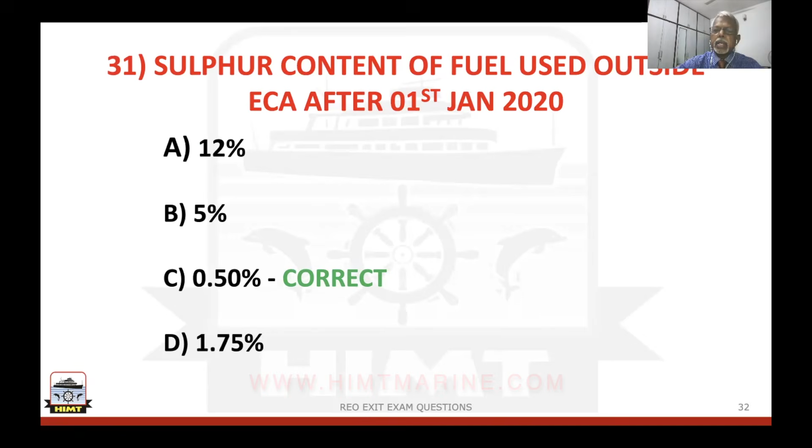Sulfur content of fuel used outside emission control area after 1st January 2020. It's the latest regulation. Yes, all of us are aware: 12%, 5%, 0.5%, or 1.75% mass per mass. That is the sulfur content, that is how it is mentioned. So the right answer here is C, 0.5%. That is the correct answer globally, whereas in an emission control area it is 0.1% only. So 0.5, C is the right answer here.

Which type of fire occurs mostly at machinery spaces? Is it A, B, B, C, or A, C? So we all know what is a Class A fire, Class B fire, Class C fire. B fire is all about liquid related fires; oil fires come under B. And Class A fire is your cloth, paper and things like that. So B, C. Class B fire, Class C fire, that's the right answer here.

Fire in accommodation is due to faulty electrical connections, smoking, presence of oil. The last option given here is both A and B. Presence of oil, chances are less. So it is both A and B. D is the right answer, the reason for accommodation fire.

Appointment of designated person ashore is through company, charterer, recognized organization, ISM. If you see, your DPA requirement comes as one of the elements of your ISM code. So D is the right answer. How can the safety on deck be improved? The answers given are by inspecting daily at 8 in the morning, the bosun will take care, by keeping deck clean and clear, or both above are correct. That is the right answer. D is the right answer to maintain safety on the deck.

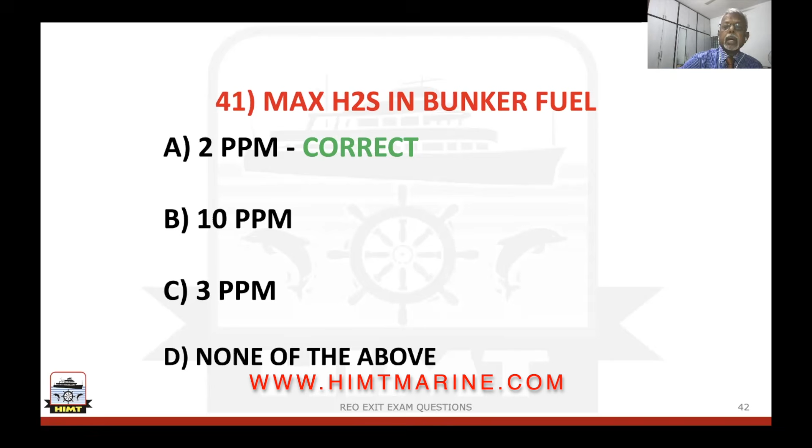The next question is hydrogen sulfide in bunker fuel. How much is allowed? Is it 2 ppm, 10 ppm, 3 ppm, or none of the above? Bunker oil, as we are aware, comes from crude oil. Crude oil always has sulfur in it, so hydrogen sulfide will be there. Desulfurizing is done in the refineries. The maximum allowed is only 2 ppm. So A is the right answer here.

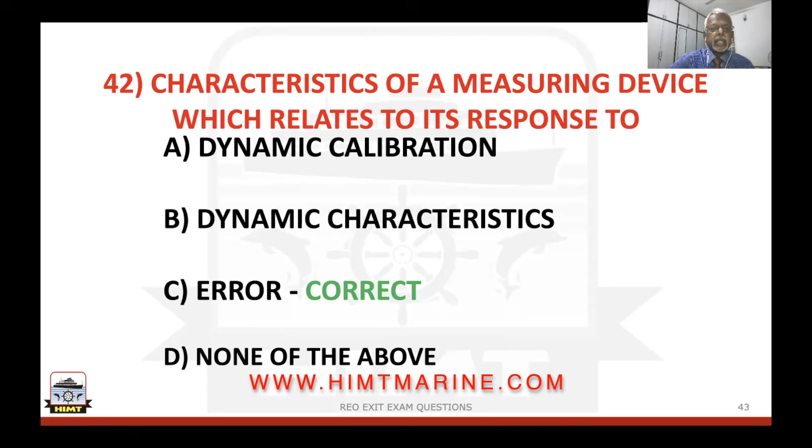Characteristics of a measuring device which relates to its response: is it dynamic calibration, dynamic characteristics, error component, or none of the above? For a measuring device, when you are looking at the characteristic, the error component is the right answer. You need to select C here. How many codes are there in the oil record book? Is it 10, 8, 7, 9? It's very easy, all of us have done it on board. There are 9 codes.

Which of the following can be done to reduce cold corrosion? As all of us are aware, cold corrosion occurs when the liner surface temperature near the scavenge ports falls below the dew point; condensation occurs and the moisture turns into droplets. In contact with sulfur oxides during blow-past, it forms dilute sulfuric acid, which is highly corrosive.

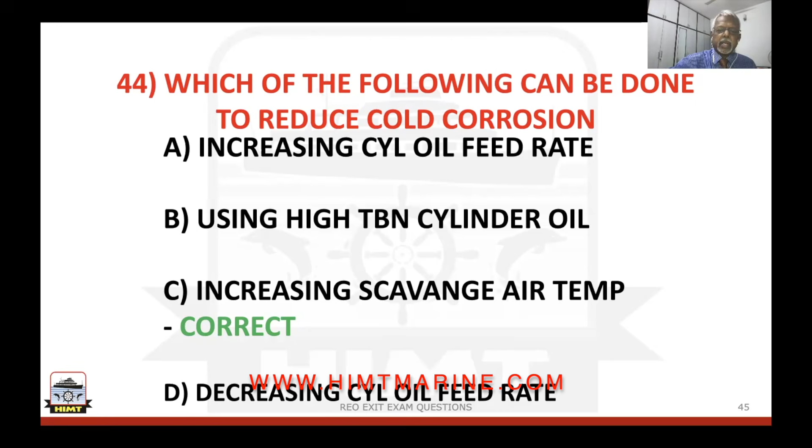The answers given are increasing cylinder oil feed rate, high TBN cylinder oil to neutralize the acid, increasing scavenge temperature, or decreasing cylinder oil feed rate. Yes, we have practically done it. The right answer is C. You need to control and increase the scavenge temperature.

What is the minimum capacity of a bunker sample? As per MARPOL Annex 6 regulation 18, it is given how many samples you will take and what the sample capacity is: 200, 400, 600 or 800. 400 ml is the right answer here. Who issues the IOPP certificate? As you are aware, it is a statutory certificate. The answers given are flag state, port state, class, and any one of the three. Select flag state here.

Next question here is, panting frames are present in the after double bottom, centerline tanks on tankers, forward and aft peaks, and forward double bottom. So panting and pounding, the vulnerability is just forward of the ship. So the right answer you need to choose is D, forward double bottom.

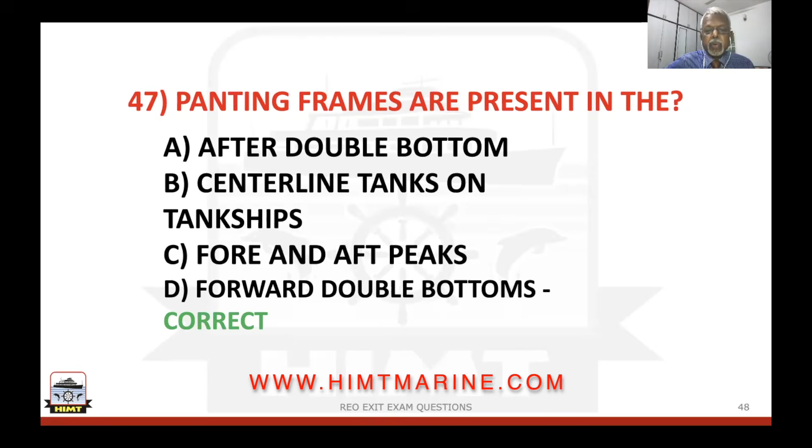The right answer. Loss of reservoir buoyancy will cause the vessel to float at an angle, most probably sink, never float upright, become a tender ship. So when a ship is having intact stability, we know that the reservoir buoyancy is 100%. But when there is a breach, that means loss of reservoir buoyancy will occur. So in the worst case scenario, what will happen? The ship will sink. So B is the right answer.

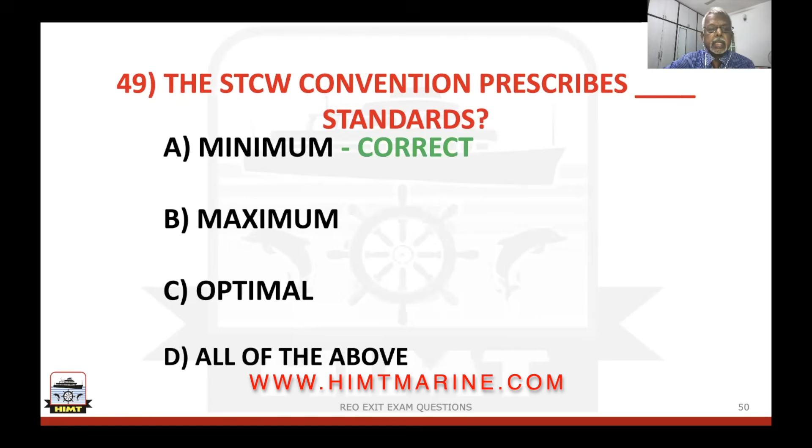The STCW convention prescribes minimum standards, maximum standards, optimal standards, all of the above. The right answer is minimum standards. Lifeboat engine should be capable of starting at minus 15 degrees within 2 minutes, minus 5 degrees, plus 15 degrees, plus 5 degrees within 2 minutes. So the right answer here is minus 15 degrees. That is the right answer. Select A.

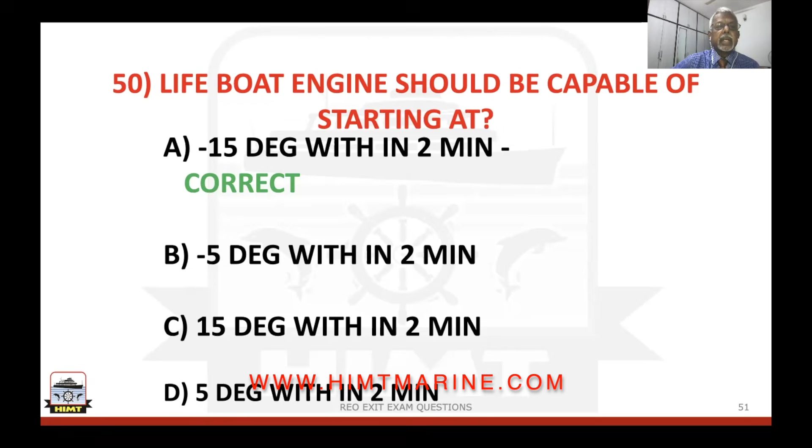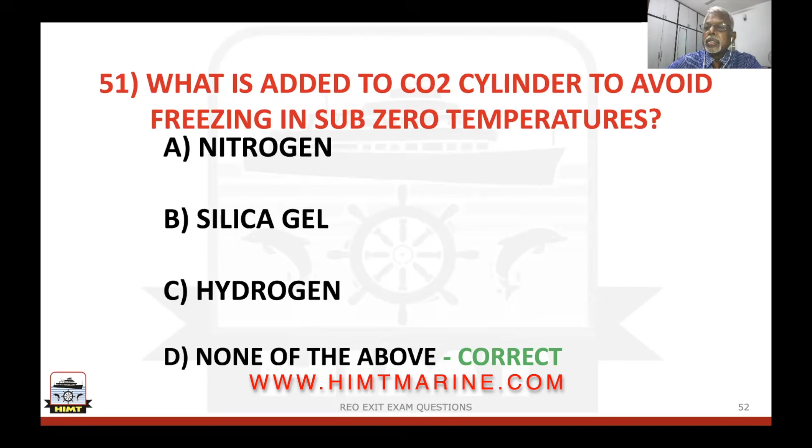What is added to carbon dioxide cylinder to avoid freezing in sub-zero temperatures? As you are aware, CO2 cylinder, CO2 is in the liquid form. So what is to be added when it is exposed to sub-zero temperature? Is it nitrogen, silica gel, hydrogen? None of the above. So here we don't add anything, because your CO2 is in the cylinder under pressure in the liquid form. So none of the above is the right answer.

How many chapters are there in SOLAS? The right answer here is 14 as of now. But the 14th option is not given here because the questions have been made a bit earlier. So here 6, 8, 10 and 12. So you select 12 because 12 chapters were there earlier, but additional 2 chapters like verification of compliance and polar code were added in the last few years. So even though it is 14, since that option is not given, you select 12 here. D is the right answer.

Lifeboats must be stored in such a way so that they are capable of being launched in how many minutes? 10, 5, 15, 20. The right answer here is 5 minutes.

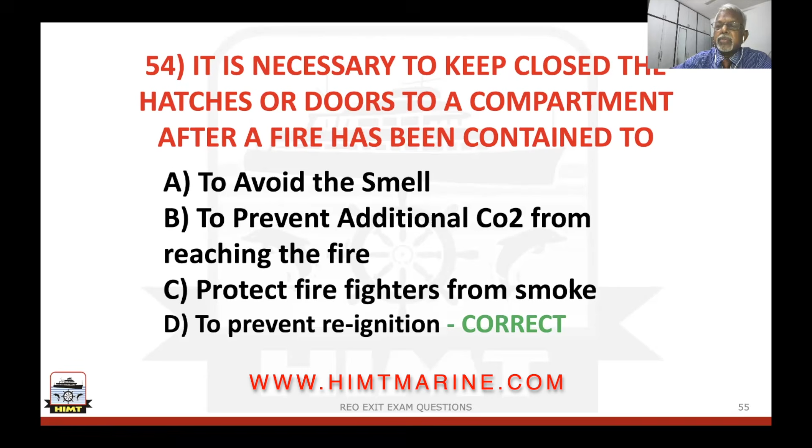It is necessary to keep closed the hatches or doors to a compartment after a fire has been contained. So once the fire is out, we need to keep it closed. Why? To avoid the smell, to prevent additional CO2 from reaching the fire, protect firefighters from smoke, or to prevent reignition. Yes, logic says to prevent reignition because when you keep it open, there is the possibility of fresh air entry, that means fresh oxygen, so reignition. So select the D option here.

Under NOx technical code, who is responsible for non-compliance? See, under MARPOL Annex 6, every engine has to have a NOx technical code, and the engine is having an Engine International Air Pollution Prevention Certificate, what we call EIAPP. So the responsibility, is it engine manufacturer, ship operator, charterer, none of the above. So here the responsibility lies with the ship operator. That's the right answer. Select B here.

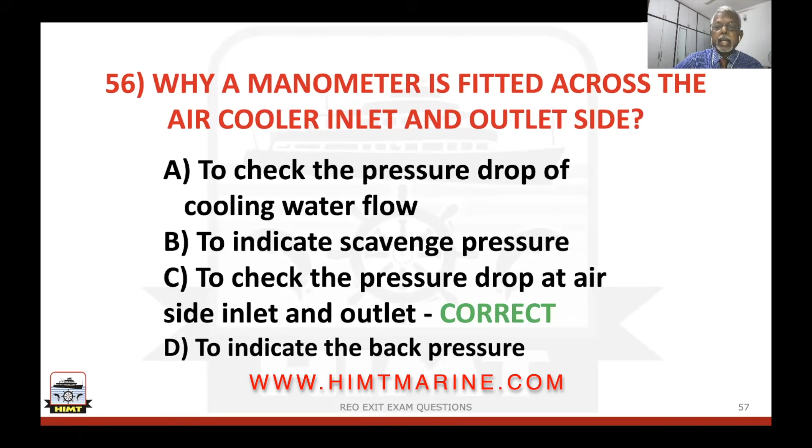Why a manometer is fitted across the air cooler inlet and outlet side? To check the pressure drop of cooling water flow, to indicate scavenge pressure, to check the pressure drop at air side inlet and outlet, to indicate the back pressure. As you are aware, air cooler, it is to check the pressure drop at air side inlet and outlet. So this will give you an idea how clean your air cooler is. So select the right answer, C.

Ship security alert system is a requirement under Part B of ISPS code, SOLAS chapter 11, the second part where we talk about maritime security, SUA Convention 1988, and none of the above. So here the right answer goes B. You need to select SOLAS chapter 11, second part. Suppression of unlawful activity, that is what C is talking about, but the right answer is B.

Under which maritime instrument is a certificate of financial responsibility issued? COFR we call it. Is it Civil Liability Convention 92 or Fund Convention or Limitation of Liability of Maritime Claims, what we call LLMC, or Oil Pollution Act 1990? So the right answer here is D, correct. Because this is a requirement under Oil Pollution Act, OPA 90. It is a US regulation, not IMO regulation. Right answer is D here.

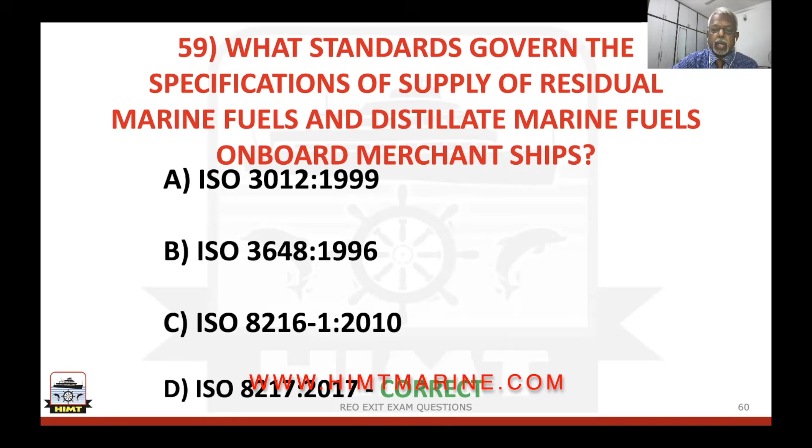Which standards govern the specification of residual marine fuel and distillate marine fuel on board? Yes, we have seen it, and then you will see the specification of what we call RMG, residual marine, or distillate marine, DMA. This type of thing comes under, here they have given ISO 3012, ISO 3648, ISO 8216, ISO 8217. So the right answer is ISO 8217. And the present latest standard is 2017 standards, which was earlier 2012, earlier 2010. So that is the right answer, D.

To check the setting of overspeed trip on a diesel engine powered generator, you should use tachometer, torsion meter, dynamometer, pony brake.

We know whenever you see speed, it means straight away tachometer. A is the right answer.

In reference to accidental oil pollution, the most critical time during bunkering, when is it? When you start to receive oil, or when you air blow the hoses, or when you are topping off, that means when you are completing a particular tank, final topping off, or when hoses are being disconnected. The right answer is topping off is the very critical period. You need to be more careful. C is the right answer here.

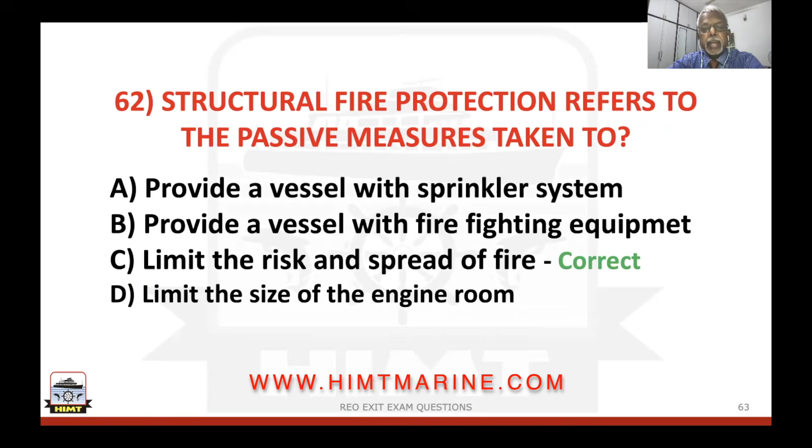Structural fire protection refers to the passive measures taken to provide a vessel with sprinkler system, provide a vessel with firefighting equipment, limit the risk and spread of fire, limit the size of the engine room. Here for structural fire protection, you need to choose C, limit the risk and spread of fire. That is the right answer.

And if you look at the similar question here, maximum difference in output for the same measured value within the range of measuring device, one obtained by increasing from 0 to the higher and the other by decreasing from a higher value to the lower value. So this is what we call hysteresis. Linearity, hysteresis, span, none of the mentioned. So the right answer here is hysteresis.

What is the minimum rest hours in a week to be taken by seafarers as per Maritime Labour Convention 2006? 72, 75, 77, 78. So the right answer here is 77. Select C.

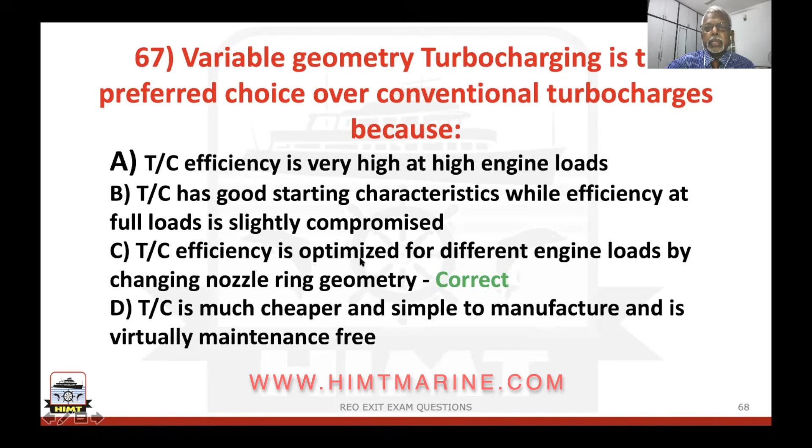If you look at all these four options, the right answer is C, different engine loads. When engine load varies, what does it do? It changes the nozzle ring geometry so that the efficiency is optimized. That is the purpose of variable geometry turbocharging. C is the right answer here.

The performance of a heat exchanger depends on airlock in fluid spaces, fouling of heat transfer surfaces, failure of division plate in the multipass system, all of the above. With any of A, B, C, you will find the heat exchanger efficiency or performance will drop. So select D. That is the right answer.

A silicon controlled rectifier is a solid state device used to change AC to DC and control relatively high load current, AC to DC and control relatively low load current, DC to AC and control relatively high load current, DC to AC and control relatively low load current. As we are aware, a silicon controlled rectifier always means AC to DC. So out of A and B, the question is whether it is high load or low load. It is high load. So the right answer is A. Select A here.

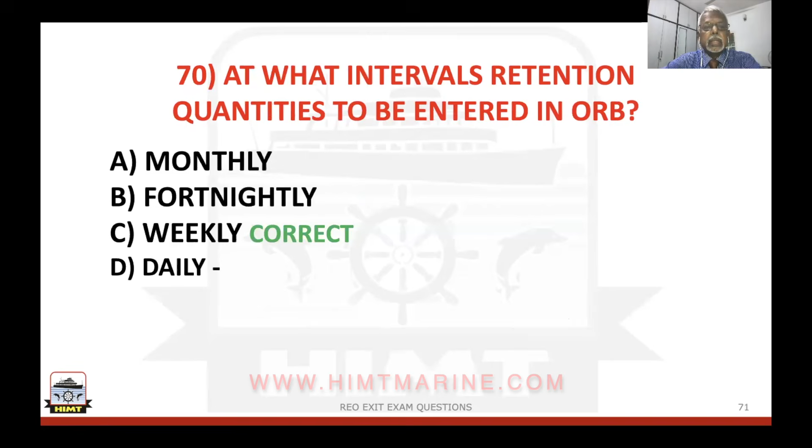At what intervals are retention quantities to be entered in the oil record book? Monthly, fortnightly, weekly, daily. Yes, all of us are practically doing it. So it is weekly.

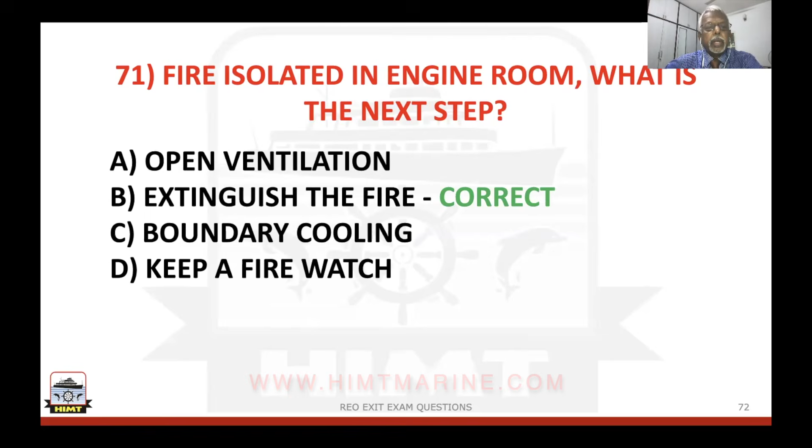Fire isolated in engine room. What is the next step? Is it open ventilation, extinguish the fire, boundary cooling, or keep a fire watch? Once the isolation is done, then put it out, extinguish the fire. That's the right answer.

Is carbon dioxide heavier than air? You know the right answer. Is it true or false? Definitely it is true. Carbon dioxide is definitely heavier.

Okay. So gentlemen, we have gone through the 72 questions we have collected from the students who have faced the exit exams earlier. So we have discussed it. I hope it's of some value and direction for you.